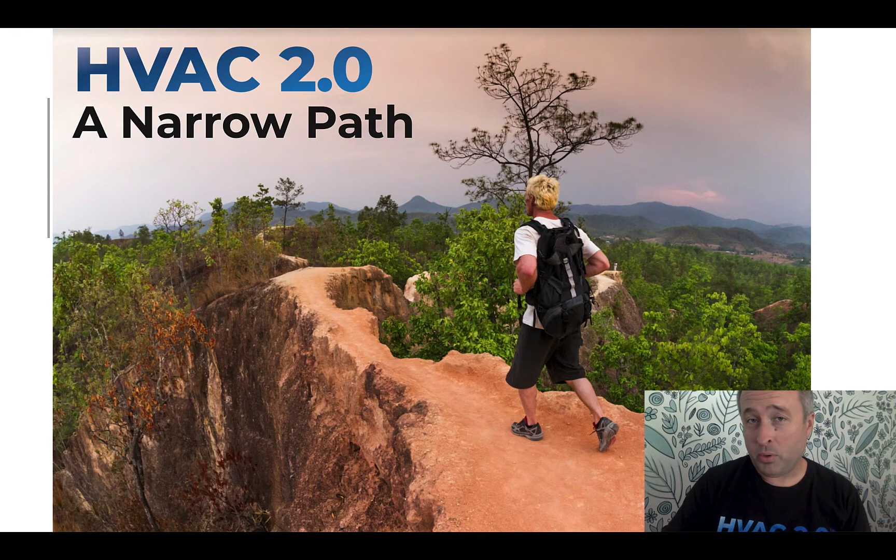To begin, I want to mention, like I did in the first video, HVAC 2.0 is a narrow path. When you're trying to combine building science and HVAC, it's a really narrow path to stay on, which is why no other program has actually been successful doing this. I want to dig into just a little bit of why.

This was made by Sam Myers of Retrotec, who really gets what we're doing with HVAC 2.0. Retrotec's one of the blower door manufacturers. He started off by saying HVAC 2.0 is like having an experienced caddy with you every step of the way during each project. The process and guidance from 2.0 members help you select the right tools and approach for every shot you take to find a viable solution to make clients happy. He totally nails it here. Everything is customized, but there is a very specific process to get there.

The curse is the traditional HVAC approach, or what we call HVAC 1.0, can allow you to come up short. In most cases, comfort issues are not solved by swapping out one box for another. The building science education provided by HVAC 2.0 gives you a diverse selection of tools in your bag to tackle issues, just like you need a selection of clubs for different positions of the course. So you can see this one comes up short, lands in the drink.

The curse is the home performance or building science full-on method. Sometimes that method of solving comfort issues can be like using a driver on a par 3. It can overwhelm clients, you give them way too much information, and allow you to miss the mark, providing more frustration than solutions for both sides.

HVAC 2.0 slows this process down. That's key. This is all about slowing the sales process down. First, you do it for yourself, and then you do it for your clients as you get good at using it. This also allows the client to play a role in what path to take next, which relieves you of liability in the end, or responsibly avoiding responsibility. This also helps develop positive relationships with clients and build trust.

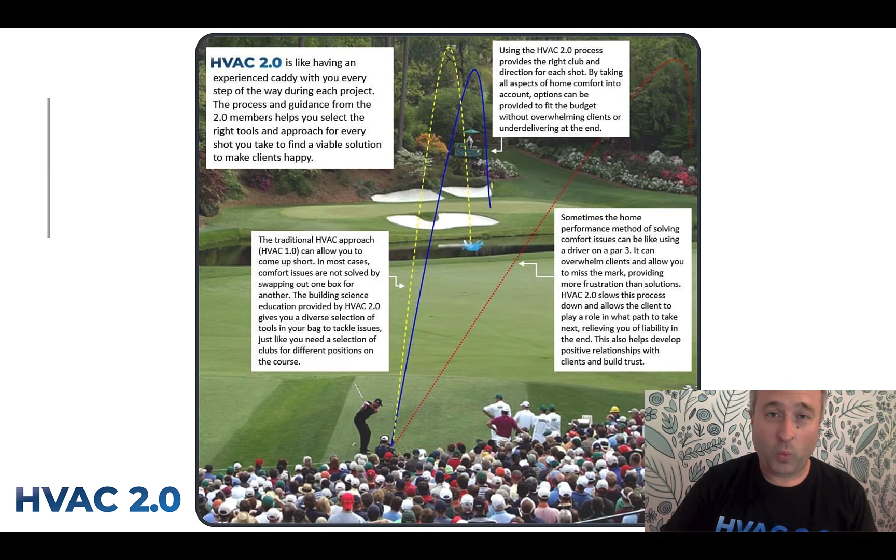And I promise this is one of the very, very few times you're going to see me reading a slide. But this is important. It's understanding that for every single shot that you take, you need to take a look at what is the right tool to do it, and the selection process for that is what the 2.0 process is made to do. So just to repeat, you're going to need to stay in your lane. That's important through this.

Also critical, and in the onboarding video I'm going to mention that this is very, very based on the Sandler sales system. So if you're going to understand what 2.0 is doing, you need to listen or read these two books, or else it's going to sound alien and feel weird. You need to understand why we are doing things.

So go get yourself... you can't teach a kid to ride a bike at a seminar, and Selling to Homeowners the Sandler Way. We generally recommend listening to these, because most people in the HVAC industry have windshield time. Use your windshield time for this. Because again, if you don't dig into Sandler, you're going to miss the boat. And what this leads to, Sandler gives you the keys to get to where, if you feel like you're selling, you're doing it wrong.

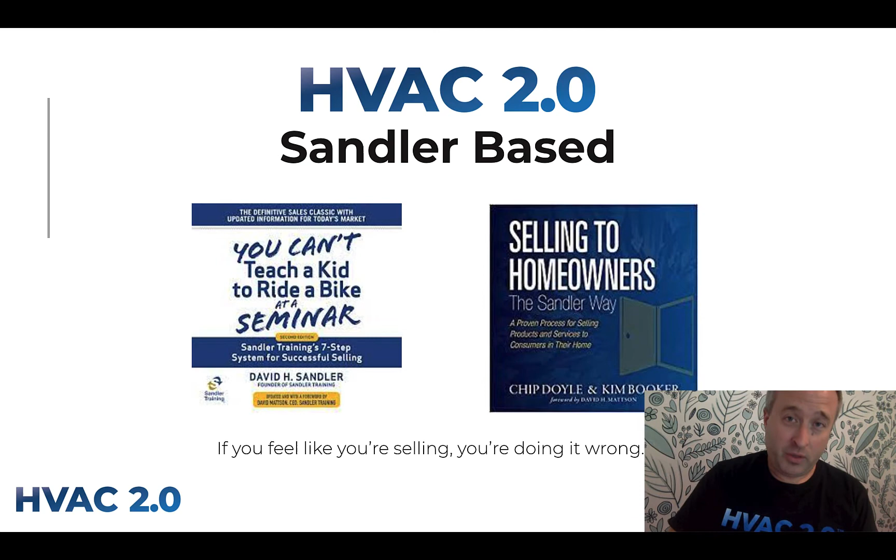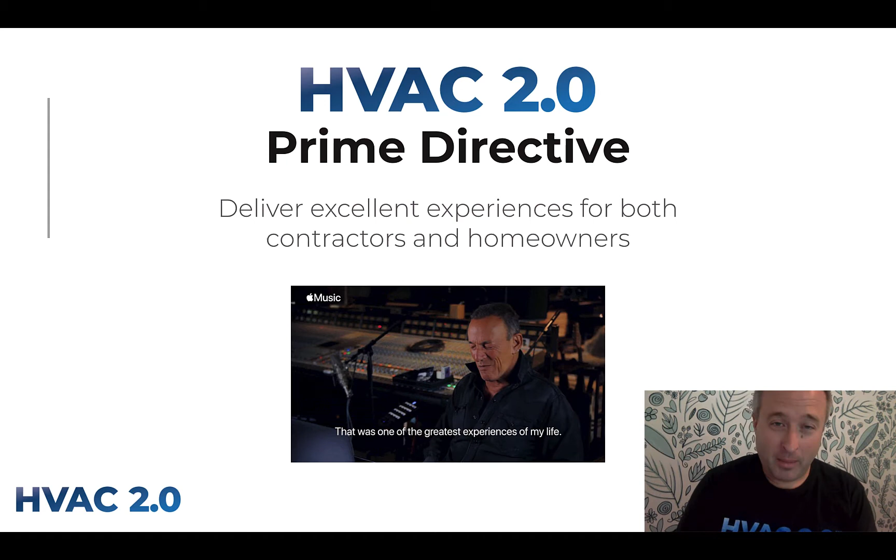Now, quick note, the prime directive of HVAC 2.0 - shamelessly stealing from Star Trek because I'm a bit of a nerd. The prime directive is to deliver excellent experiences for both contractors and homeowners. This is a really hard balance to strike because you can make one or the other happy, but to make both of them happy at the same time is pretty challenging. So that's what we strive to do in this.

Here's what that looks like. So for you, if you've ever felt like you're selling, you're doing it wrong, you're going to get paid for your expertise rather than doing a bunch of dog and pony shows for free. And you will get to responsibly avoid responsibility - don't take the blame for stuff that you don't need to take the blame for.

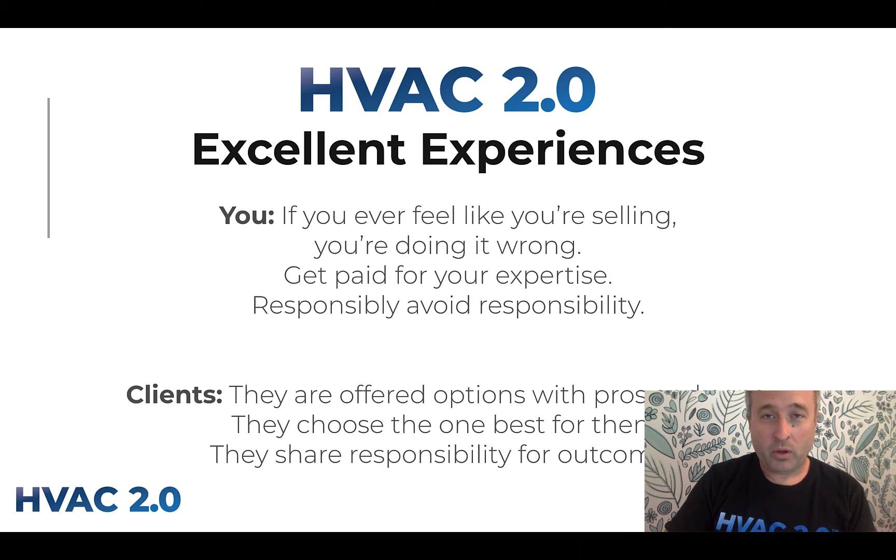For the clients, they're offered a bunch of options with pros and cons, so they get education through this. They choose the path that is right for them at every step. And most importantly, they share responsibility for outcomes, so you are not borne with all of that responsibility on your shoulders. So this is the process, and this is what we're going to walk through here in this video.

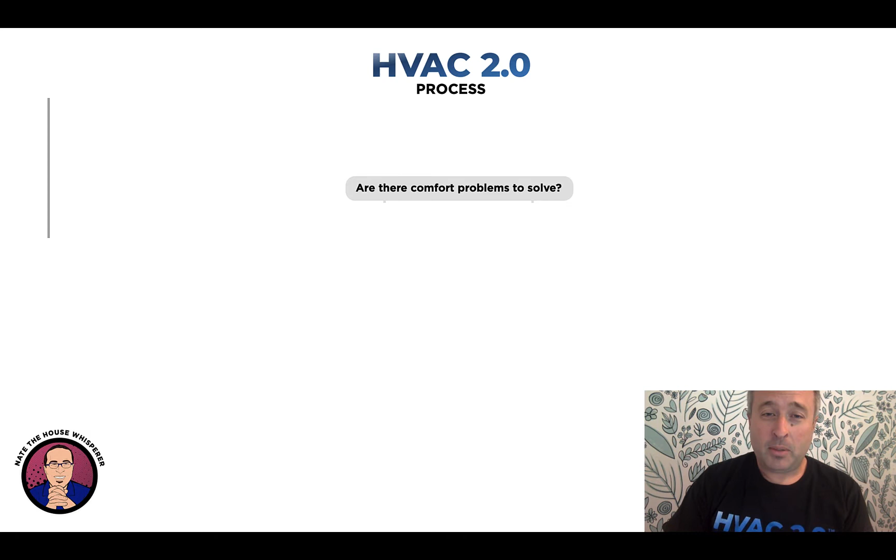So let's start with, are there comfort problems to solve? That's the key thing. You need to understand what the answer to this is, because if they don't have any problems to solve, you're just going to change their box. And so that's what the free quote looks like. If there aren't any issues, just change the box.

Important piece here, no free consulting. If little Johnny's room doesn't heat or cool well, don't talk about little Johnny's room. Let them know you have a process to help you figure that out, because otherwise you're just guessing. So stop with the free consulting.

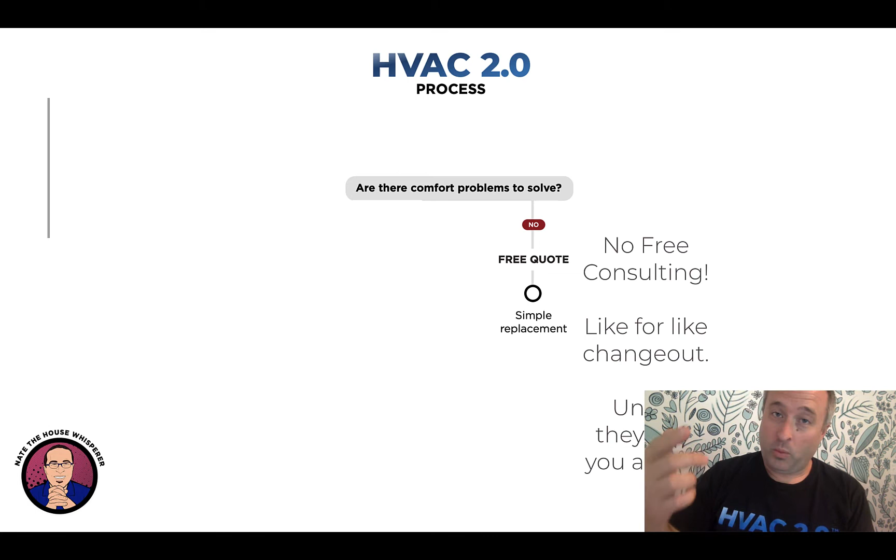This is going to be a like-for-like change-out, with the only exception of unless they give you a spec. So they need to tell you what size equipment they want and preferably what type of equipment they want - single stage, two stage, modulating, whatever it might be. And this is where you get to put weight on them.

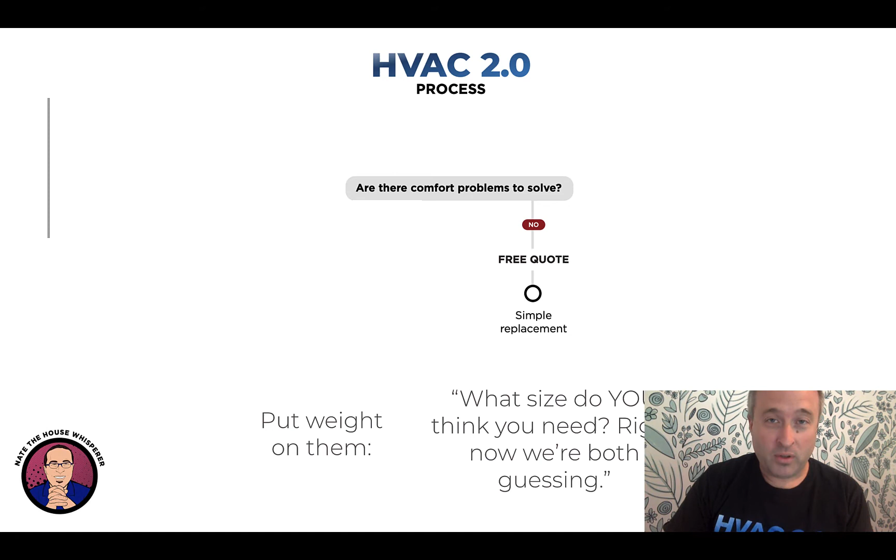This has led to some pretty funny stories when a homeowner's like, well, what size do you think I need? And the 2.0 contractor replies, I don't know. What size do you think you need? We're both guessing at this point, so your expertise is as valid as mine on this, because it can vary so widely. And that really makes the homeowners blanch and step back. And that's an important thing to do - slow them down, transfer that responsibility to their shoulders.

So you can always say, I'm happy to install that, but if duct pressures, meaning static pressure, is above manufacturer specifications, you are responsible for the cost of duct modifications. So you're helping educate them. This is really important, particularly since all furnaces come with ECM motors now. So we're hearing of a fair number of failures of ECM motors coming from high static pressure in ducts, where the old PSC just trundled along.

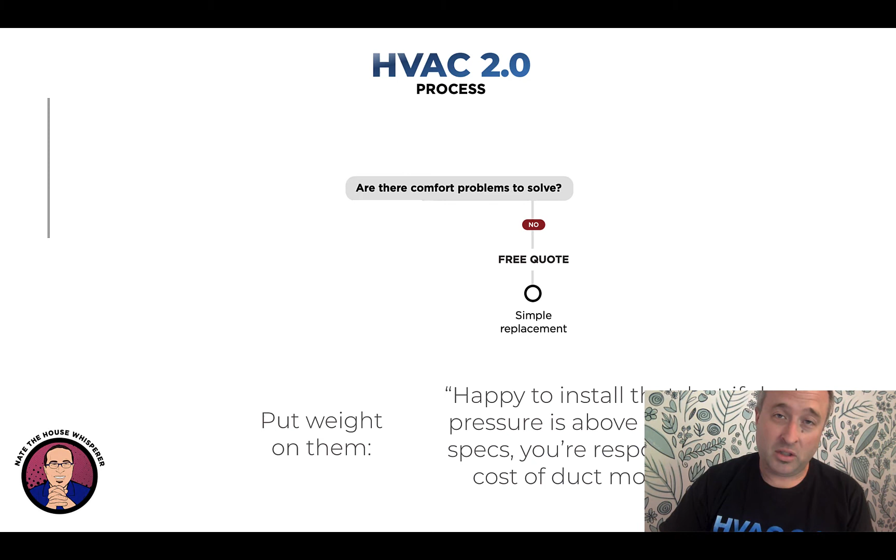So if the answer to there are comfort problems to solve is yes, that is when you do an HVAC 2.0 comfort consult. This is a paid service - again, you get paid for your expertise now. This is about the split that we're seeing from contractors that are doing a good job of educating their clients about these two paths. About 30% are going comfort consult, 70% are going free quotes. And the ones that are doing the free quotes, the amount of time they're spending on those is halving, and it is not hurting closing ratios.

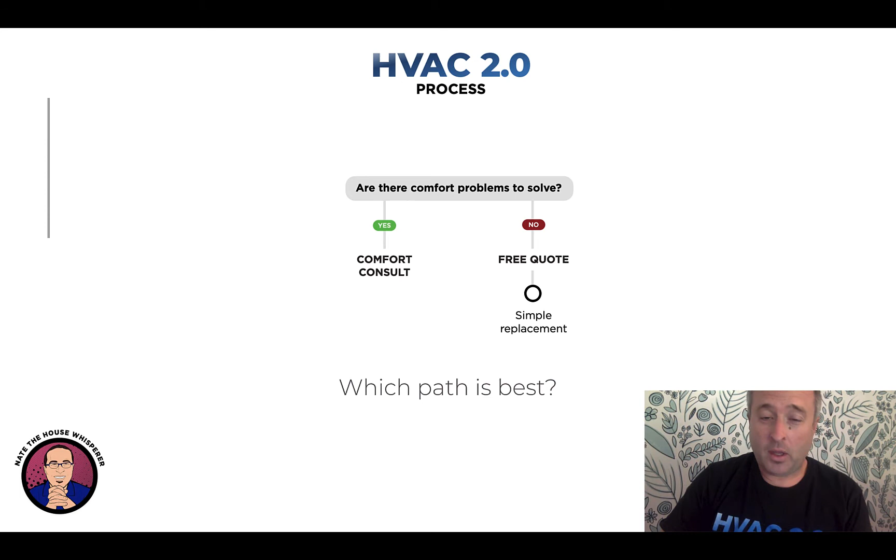So you're just flat out spending less time. Now you have to ask which path is best here, and this is for the consumer to decide. And you have them decide by asking them what we call the 4 questions. And they are: are there rooms that don't heat well? Are there rooms that don't cool well? Are there any health issues, usually respiratory, in the house? And are there any moisture issues in the house?

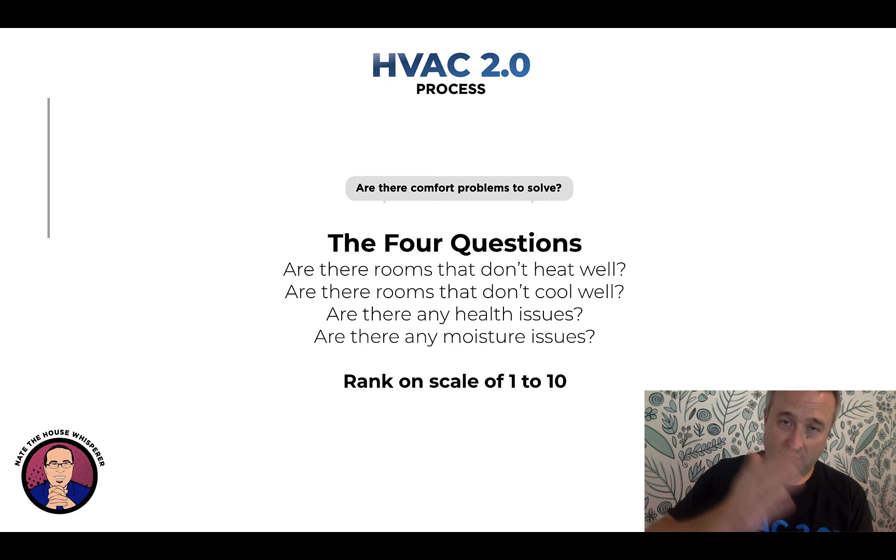And for each of these, it's not a yes or no - it is a ranking thing on a scale of 1 to 10. And here's how it scores: if you answer 1 to 12, the process recommends a free quote. Like, don't mess around, just get a free quote, change your equipment out, move on.

If they are in 13 to 18, they're in a gray area, so now they need to really think about which path they want to choose. And then if they are 19 to 40, it's a comfort consult. That's just recommended. You've got problems to solve, so let's figure out what they are and how to solve them.

And then there's one little caveat. If they answer 8 or higher to any one question, a comfort consult is recommended because they have something to fix. Important note, this is an automatic tool in the software, and this also is embeddable in your website, so somebody can go fill this out and shoot their lead right into the 2.0 software.

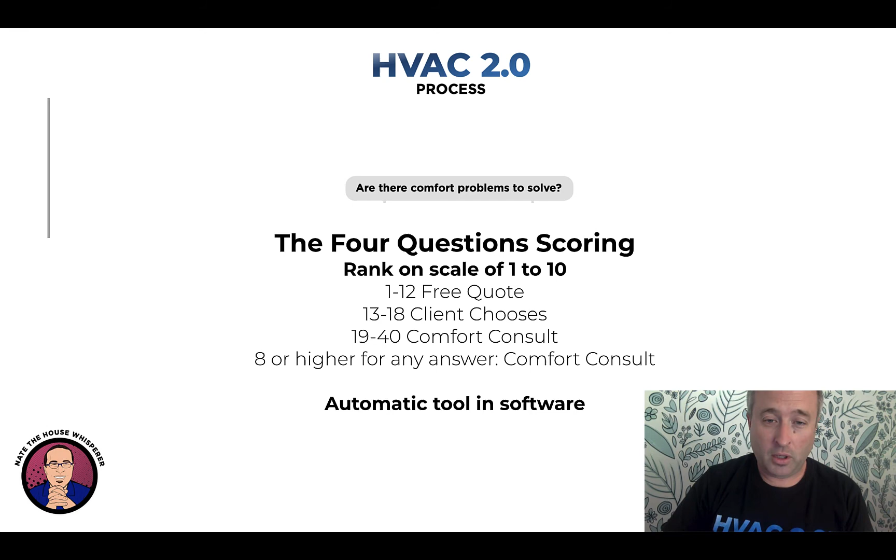Here's what it looks like in the software. Parts of my house are uncomfortable or sticky in the summer. And then we give them a few things to kind of cue them to think about it.

Is it warmer when you walk up the stairs? A common complaint. Does it feel sticky inside sometimes? Do you notice odors on humid days? Is any room noticeably warmer than the rest of the house? Is it hard to fall asleep sometimes because of the heat?

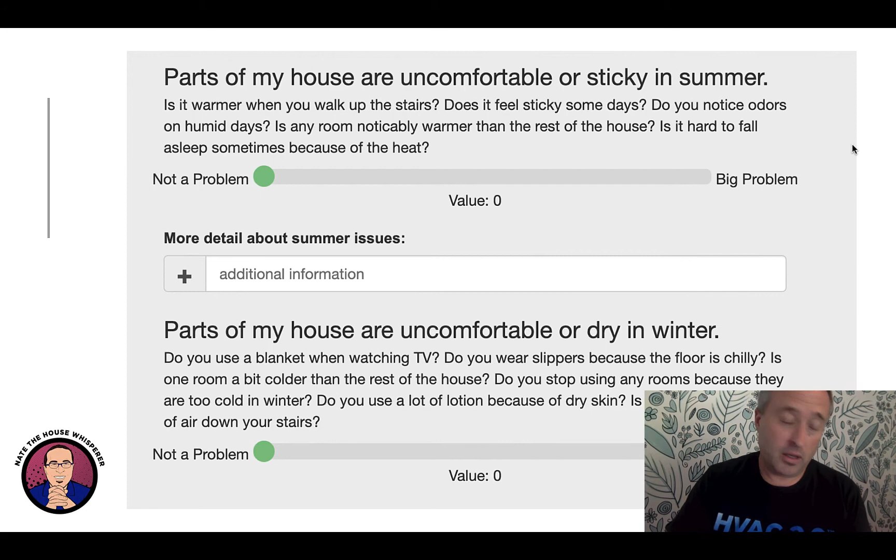So we're trying to introduce them to pain questions that help them answer this question well and accurately. And then each one gives them a place, as you can see here, for additional information so they can explain about that, because some people want to go on, and other people just want to keep moving. So lets either one be happy.

And then does anything not heat well? Here are the health concerns. And then examples of moisture issues, mold or mildew, overflowing gutters, standing water, rotted wood, things like that. So these are all in there, and it's part of the intake process.

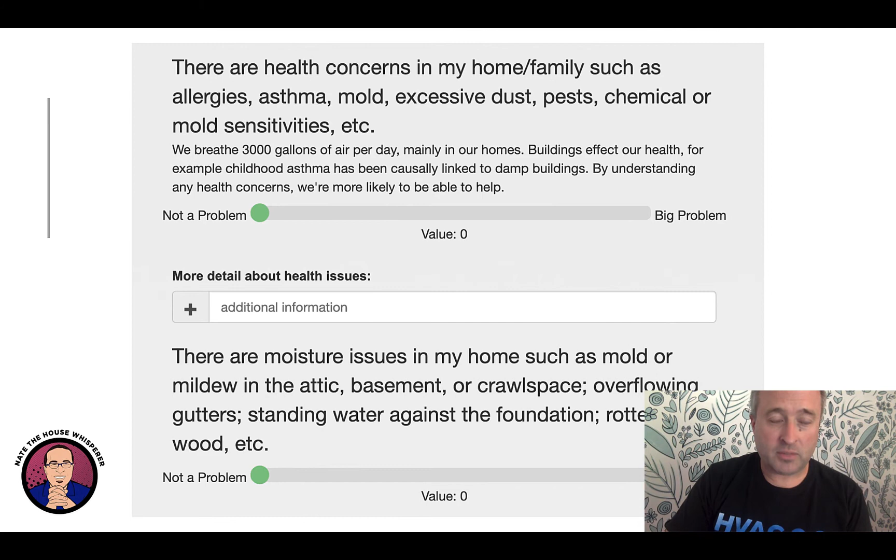So next piece is the second big question in the 2.0 process is HVAC likely to solve the problems that the client has? And you figure this out by getting a good understanding of what their goals are, what their house needs, and what their budget is.

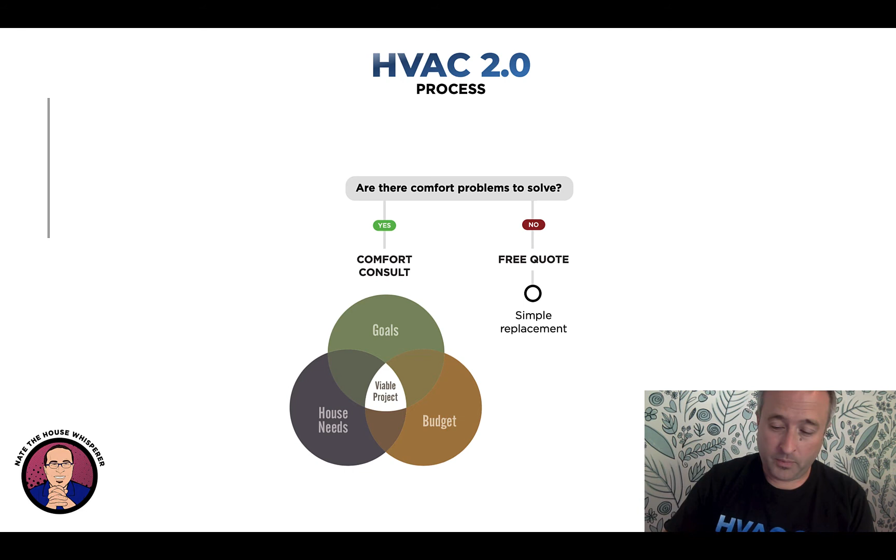And the budget, very important here. This is not what will it cost to fix. This is what is it worth to fix, and is there any way to get there? And if those three things can cross, you have a viable project, or now we're calling this the sweet spot.

And what it looks like, you do a detailed interview, you do a blower door test. The blower door is the only tool that you have to do 2.0. Then you will do a quick load calc. There's several tools that do that. Don't spend hours doing a load calc.

You should spend minutes. And then you put together a report for that client that helps them understand what you discovered, and then helps point them in a certain direction. So you don't tell them which way to go, but you give them suggestions on which way to go.

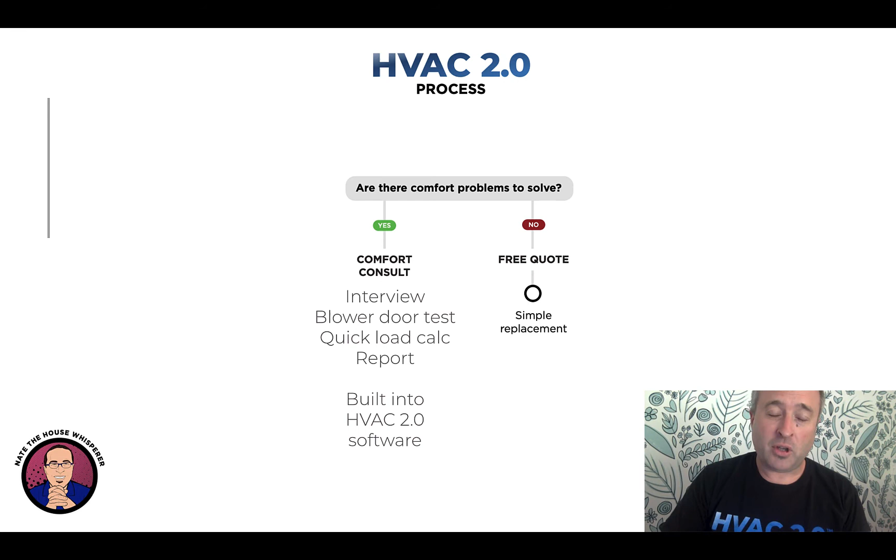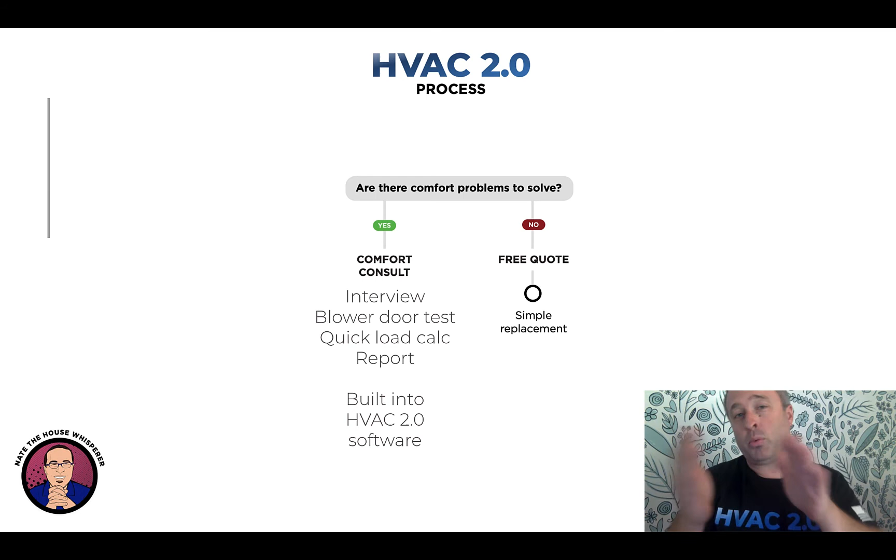All of this is built into the 2.0 software. The software, I don't really view it as software, frankly. I view it as a way to keep you on track because that path is so narrow. So this will keep you on that narrow path without falling off to one side or the other. That is what the software is made to do.

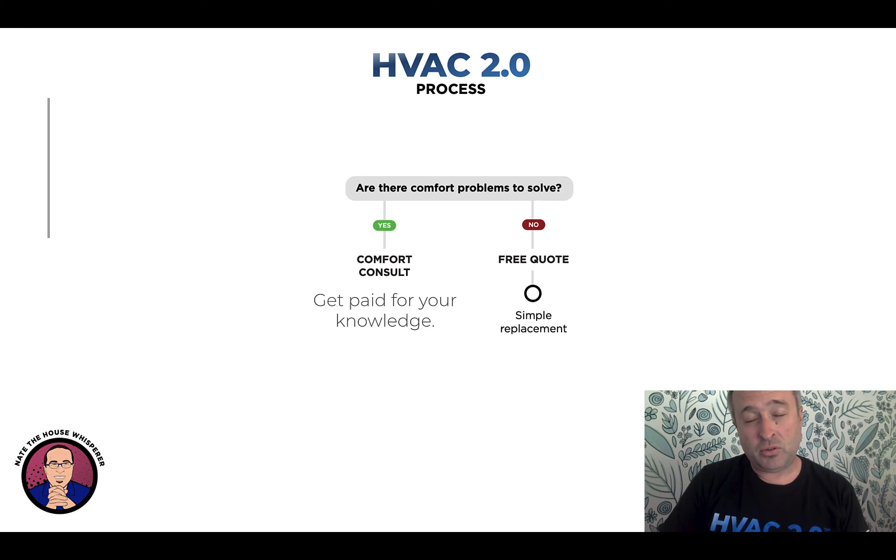And most importantly, you're getting paid for your knowledge. So remember that. Another important point here, the Comfort Consult, this isn't something to go charge a fortune for, because now you are getting paid for something you didn't get paid for before, and this is going to lead to bigger sales and better margins. So the goal here is to cover costs, not to make it a profit center, because this is offsetting marketing costs now.

Now, if the answer to is HVAC likely to solve the problem is yes, now you do a tailored replacement. So now you know what size they need. They're going to be educated about single stage, two stage, and variable speed. Almost everyone that goes through a Comfort Consult buys a top of line piece of equipment or near top of line piece of equipment. And then they're also very likely to buy other accessories as well, so you may sell a ventilating dehumidifier or something like that here.

Now, if HVAC is not likely to solve the problem because the house is a leaky train wreck, then you would head them towards the comprehensive planning process. This involves both insulation and air sealing as well as HVAC, and this is really what holds the process together.

So let's take a look at a different way to look at it. When you're coming in, the free quote is basically like a clinic. So let's imagine we have 100 people that have something wrong with them. 70 of them go to the clinic, they get their boo-boo bandaged up, and they're sent home.

The Comfort Consult is like the ER. There's something that's pretty seriously wrong, or we think something's pretty seriously wrong. Once they go to the ER, if they can just replace their HVAC, that's like going to the OR. All right, now we're going to the operating room, we're going to set the bone, and we're going to send you home. You'll be okay.

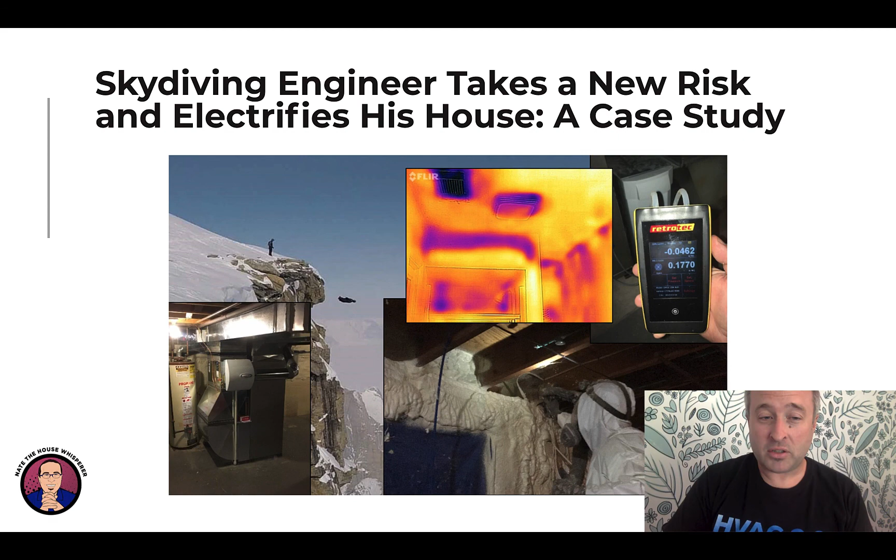So his was a pretty tough house to do. We had to combine 2 HVAC systems into one, and the house was a leaky mess, and we had to fix that at the same time. So it was not a simple project, and that'll give you an idea of what it looks like to do these.

Now, very important point, note that at all endpoints of 2.0, it sells HVAC. So this is what we noticed when we screwed up, we sold HVAC, which then made it really obvious that the ideal contractors to go to with the process that we've been developing are HVAC contractors.

So here you are. And here's what we're seeing: about 70% go free quote, 30% go comfort consult. Of those 30, 27 of them go to a tailored replacement, and only 3 go to the CPP. So the CPP is nothing to be afraid of. It's good to just know that it's there.

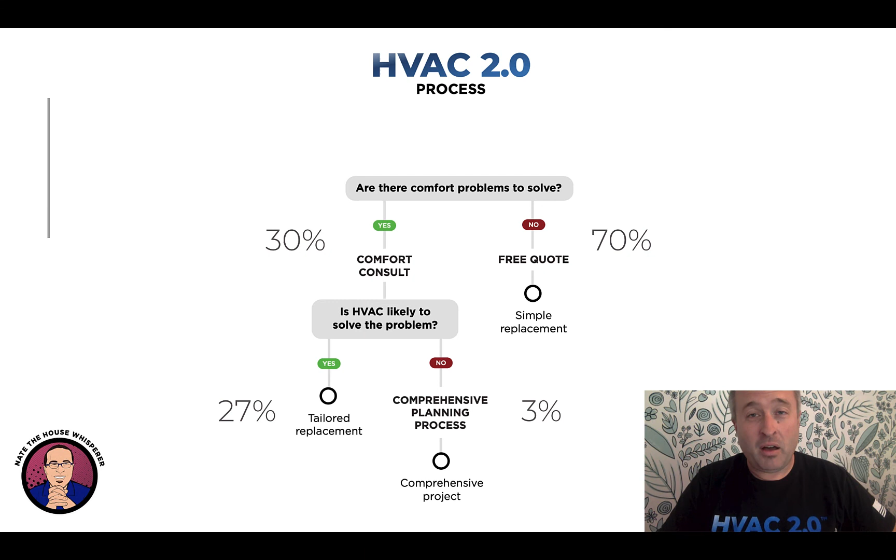And through all of this, you need to be able to jump confidently knowing that you will be caught when you get there. So if you're worried about the CPP, don't be. It's not actually that hard because we've broken it down into small steps. But know that it's there and be confident walking into any house knowing you can fix it.

But to be able to do that, again, you have to stay in your lane. So there's the full process, and this is where we'll help you work through all of this and get it implemented throughout your company. So thanks again for watching.